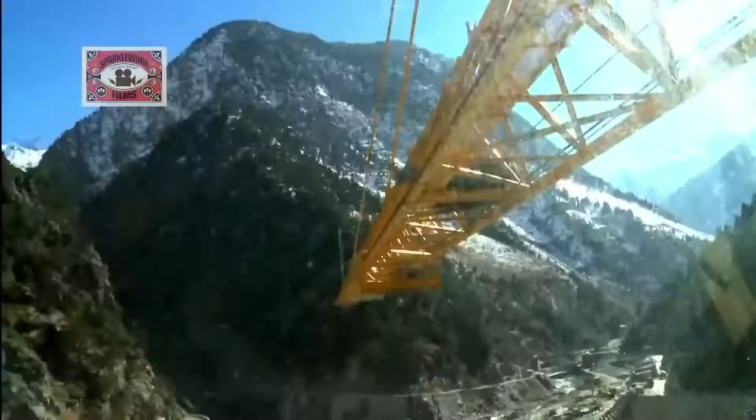There are no half measures in the founder's vision. An approximately $1.5 billion state-of-the-art hydropower project with a capacity to generate 1,000 megawatts. Once completed, it will be the largest hydropower station ever to be constructed by an Indian private company.

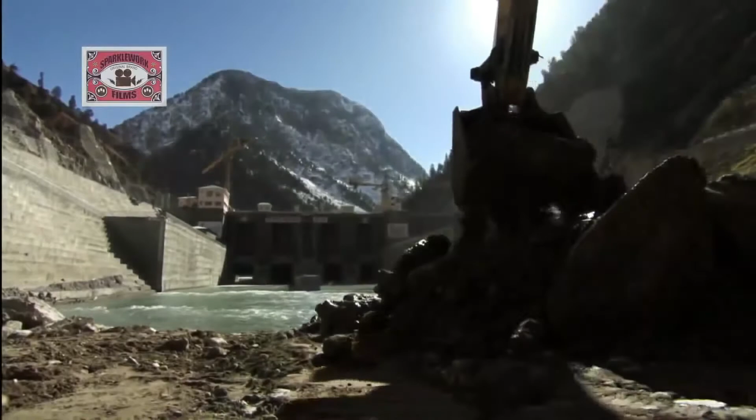When the organization was thinking of implementing the Karcham-Wangtu project, all of us were determined that let us create an aggressive timeline. So we thought let us keep a time frame of 5 years and then we will work out whether we can better it. Now, with the clock ticking, it's all about finding the perfect location.

At first glance, the tiny hamlets of Karcham and Wangtu seem an unlikely site to realize an ambitious megastructure vision. Surrounded by jagged peaks, prone to sub-zero winters and accessible only by steep mountain roads. But when it comes to the science of generating hydropower, this valley is tailor-made.

The river Sutlej provides the mass of water. The steep gradient between the proposed dam site and the power plant provides the ideal head. The main dam at Karcham will divert a mass of water from the Sutlej into inlet gates. Water will then travel along the nearly 17-kilometer-long head race tunnel, or HRT.

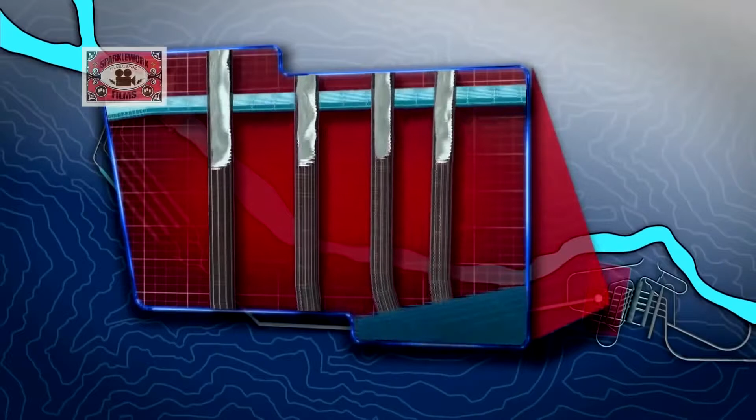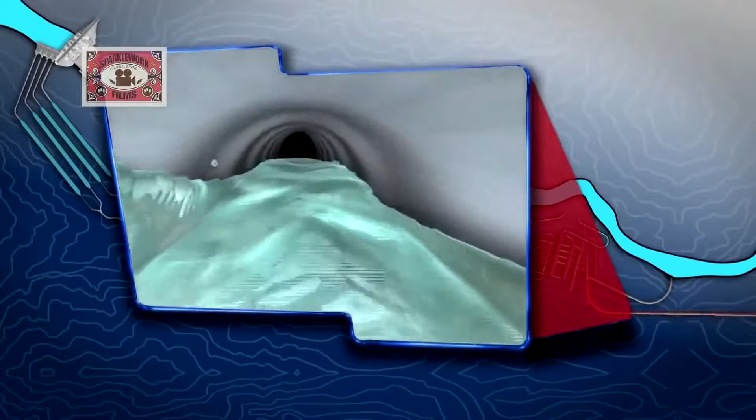From here, it's a steep drop through a height or head into the turbines of Wangtu's powerhouse. It is here that the river's kinetic energy will be transformed into electricity. Further onwards, the river Sutlej will flow out through the TRT, or tail race tunnel, back on its original course. With the blueprints in place, it's time to set the works in motion.

Strong winds blow across an intimidating landscape, and it's immediately clear setting up this construction site is not for the faint-hearted. In order to realize this onerous task, the builders commissioned their top commander to set up base camp for the men and the machines needed to build this megastructure. Brigadier Upal brings over 35 years of experience in the Indian Army to the Karcham Wangtu project. Almost immediately on reaching the site, he knows it's an uphill battle.

In the mountains, it's very rare to find a flat piece of ground. A river flowing and hardly a bank of the river, and the bank was also very low, just running along the riverbed. So to create a camp in a terrain of this kind, we had to literally fill up the whole place with a large amount of boulders, stones, rocks, sand to bring it up to the height it is today.

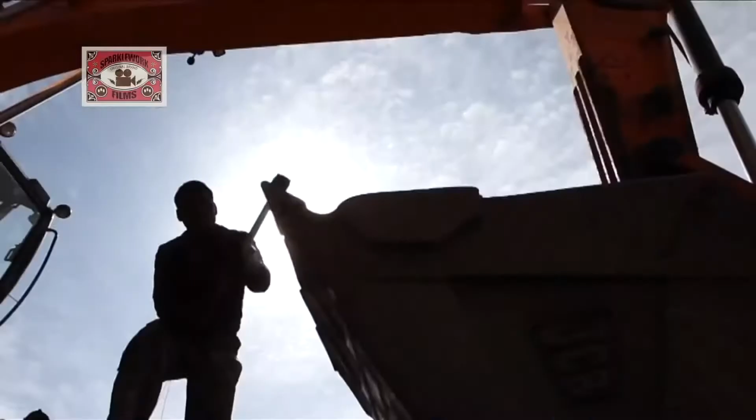Keeping steady pace, the trucks ascend to Karcham and Wangtu. Meanwhile, in the valley below, the task of harnessing the Sutlej begins. Deep in the gorges of Karcham, excavation for the dam's foundation is scheduled. But before digging can begin, there's a river to divert. The Sutlej must be temporarily diverted through a 541-meter diversion tunnel.

Two cofferdams will help maintain the river's new course, preventing water from seeping into the main dam's construction site. Cofferdams are temporary structures, often made from rock fill, which can get washed away with every monsoon. But with the clock ticking on the project's record-breaking deadline, this dam site requires a sturdier fortress. Designers create a cement-reinforced structure that won't need to be rebuilt after the rains. With the Sutlej successfully diverted, it's time now to build the dam.

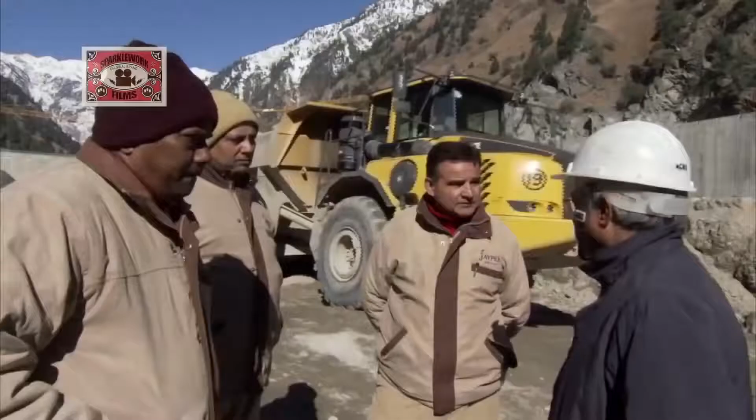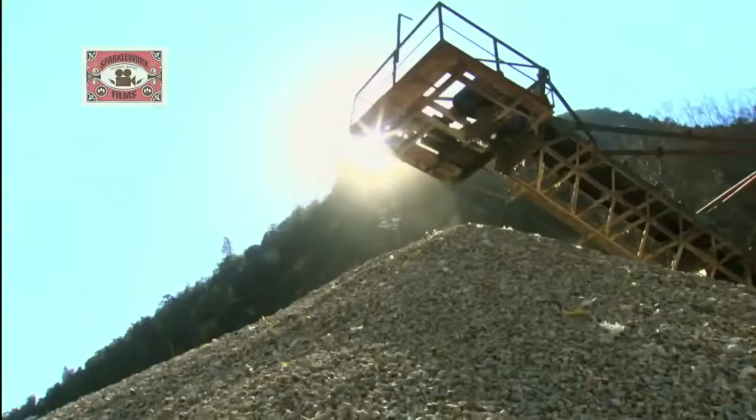At the helm of affairs is Civil Works in charge K.K. Sood. He spent the better part of his life building hydropower projects across India. When I started my career about 33 years back, a 100 megawatt project used to take 15 years for completion, and about 10 to 12 years back, a project of magnitude of 300 megawatt used to take about 7 years. Now, K.K. Sood's men must ensure that construction on a 1,000 megawatt project is completed in under 5 years.

But as the team prepares for dam excavation, it realizes that plans set by men are often overruled by nature. Geological tests reveal startling information about how deep the dam's foundations would need to go.

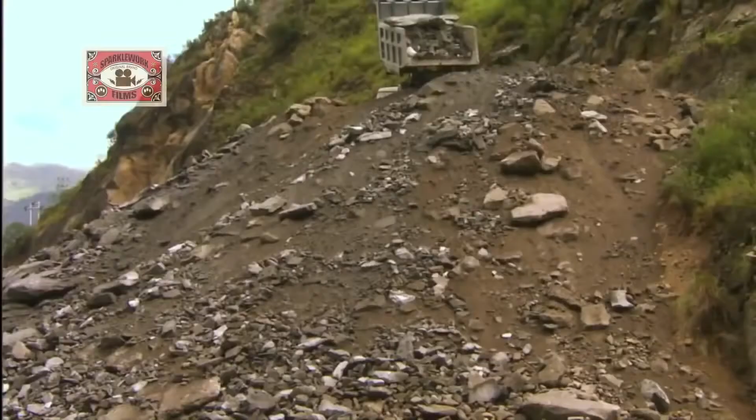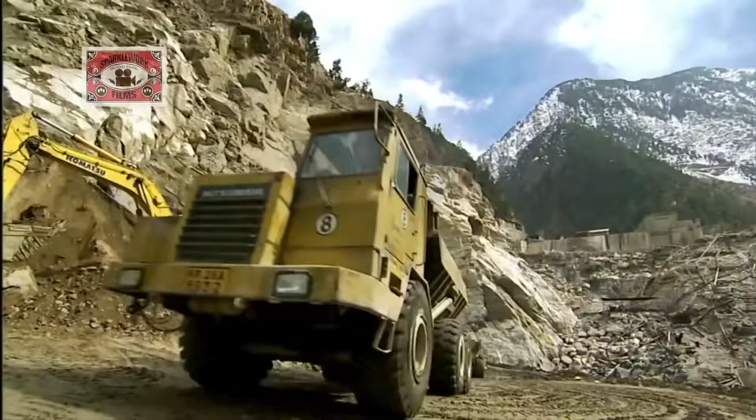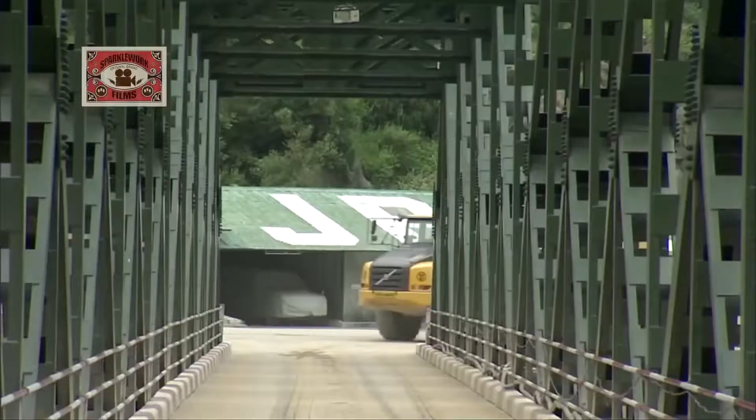Most dam foundations in similar locations go no deeper than 30 to 40 meters below the riverbed. At Karcham, the difference between the riverbed and the dam's deepest foundation level is measured to 53 meters. Engineers now stare at the prospect of going at least 10 to 15 meters further underground. They are faced with two choices: delay the date of completion and miss the deadline, or make way for the big guns of construction.

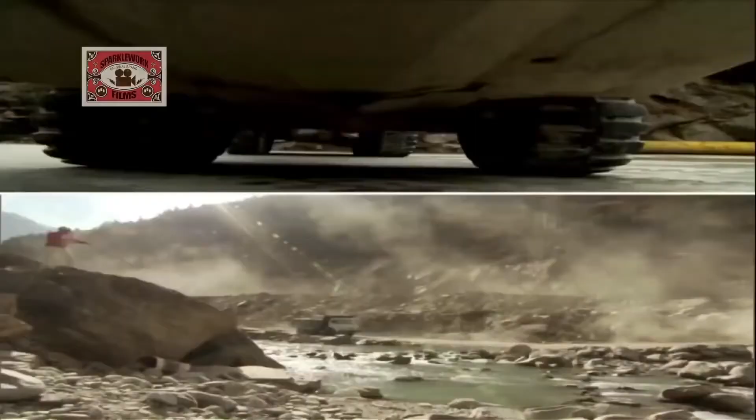Within the stillness of this North Indian landscape, there's frenetic activity underway. The foundations of the main dam at Karcham have reached depths of over 50 meters below the riverbed. Removing the excavated material is a major challenge, one that conventional dumpers literally can't rise up to. So the builders call in the big guns of construction, 6-wheel drive articulated dumpers. Their combination of flexibility with pure muscle allows loads of up to 37 tons to be carried up a height of 1 meter along a length of just 5 meters.

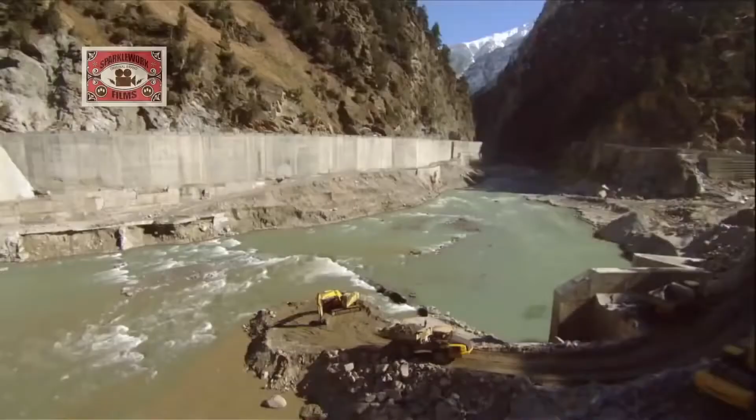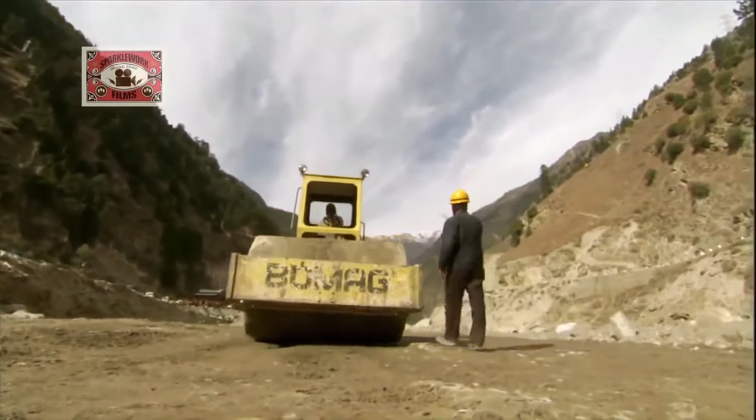While these machines expedite excavation, engineers turn to another pressing concern: securing the coffer dam at depths exceeding 50 meters below the riverbed. The design team takes a bold decision: large-scale cement grouting of the coffer dam's foundation up to depths of an extraordinary 67 meters.

We opted for jet grouted columns. This is nothing but an interlocked row of columns of concrete constructed by drilling holes. We lowered a pipe with a nozzle and pumped the cement grout at a high pressure. So there was overlapping of the columns, and a continuous impervious curtain in the riverbed was available.

As one problem is solved, another one quite literally seeps in. Work on the 1,000 megawatt Hydel power project is moving along smoothly when a minor trickle in the coffer dam becomes a deluge. The River Sutlej seeps into the main dam site, threatening to undo 2 years of excavation and building. Dam in charge Sanjay Gupta rushes to the site.

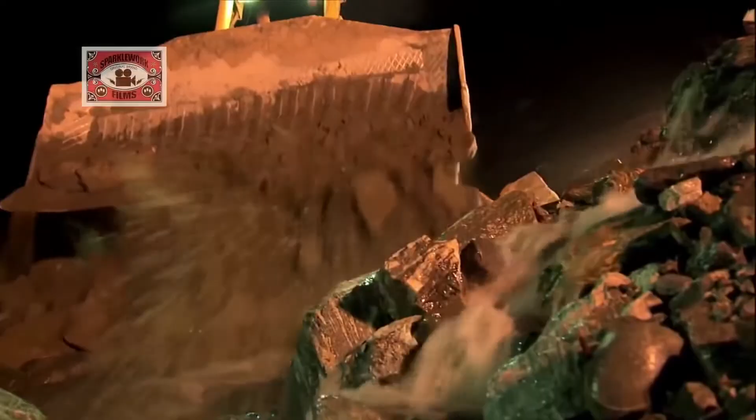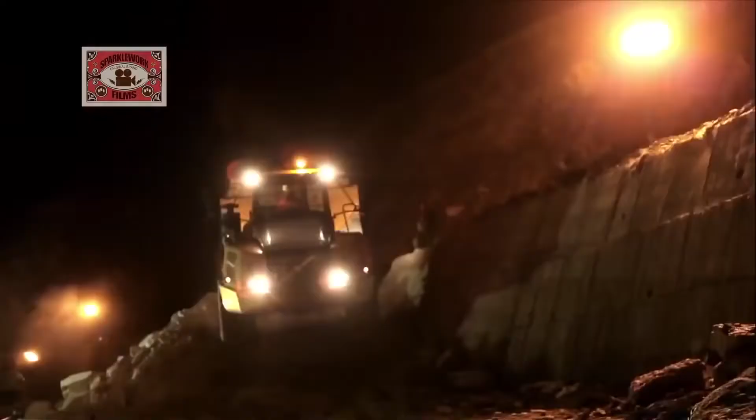Bulldozers erect a wall of rock, while dewatering pumps work round the clock to stem the flooding. Everybody works there. हर आदमी, top management, middle management, lower management, around 200 laborers. That was something different. So you can say total satisfaction.

24 hours later, the worst is over. The team has managed to convert a serious roadblock into a badge of honor. But there are bigger accolades to be earned, ones that will truly render the project a megastructure. Engineer Ashish Bajaj picks his steps carefully inside the dam's intake sedimentation chambers.

Sedimentation is a process that removes suspended solids from water. This cavernous expanse is the project's crowning glory. Its task: taking on the Sutlej's silt menace. The Sutlej carries large amounts of river sediment in its waters. This spells murder for power turbines, where particles as tiny as 0.2 millimeters can shut down massive Hydel plants.

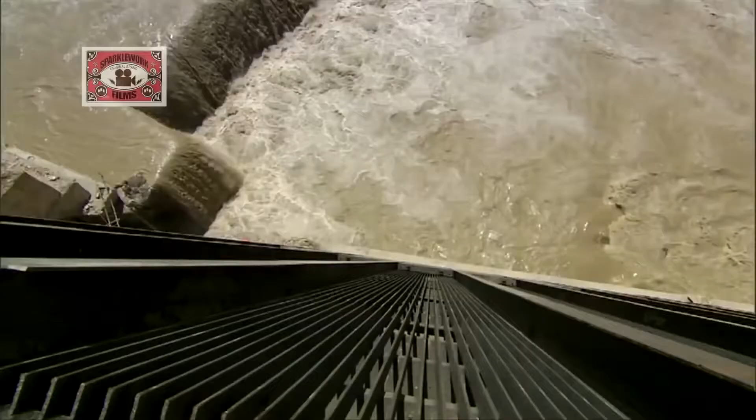To avoid this fate, water is made to enter the tunnel system 15 meters above the riverbed. This ensures that only surface water with reduced sediment flows in. To seal the deal, designers create 4 adjacent sedimentation chambers. Once the dam is filled, from intake it will be 4.5 meter per second velocity of water that will come in.

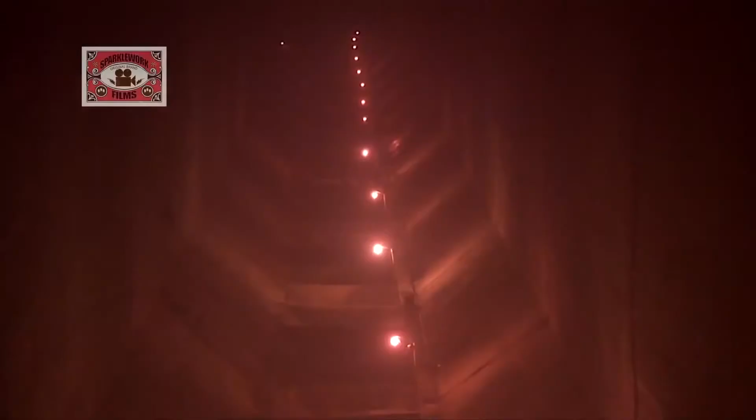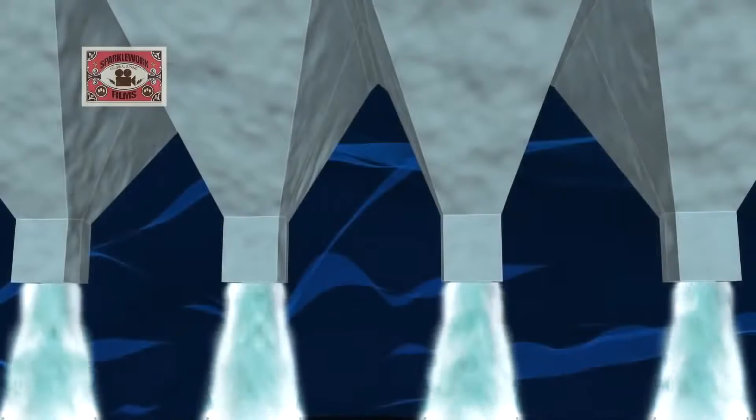And in sedimentation, that chamber has been put down up to 0.3 meter per second, so that the water gets stagnant over here. And there are 53 cones, 53 hoppers, through which these particles will get down to the flushing tank. Gravity guides silt through these 5.25 kilometer long flushing tunnels, back into the river downstream. These are the longest flushing tunnels to be found in the Indian hydropower sector.

But the record-breaking streak doesn't end here. These sedimentation chambers have a design discharge of 504 cumecs. That's a whopping 504 cubic meters of water per second. This is the world's largest chamber volumetrically, and most probably this will be going into the Guinness Book of World Records.

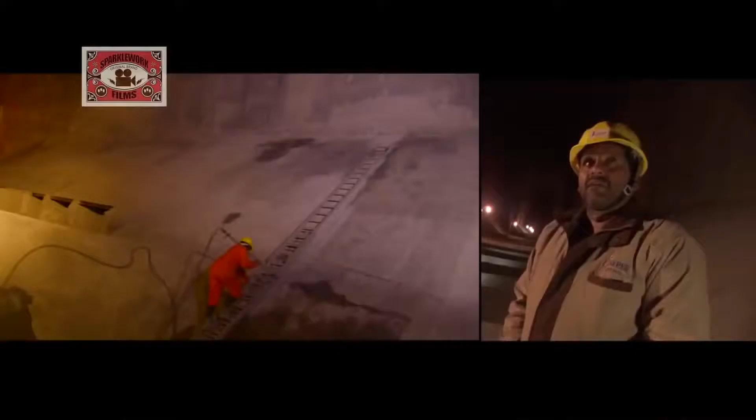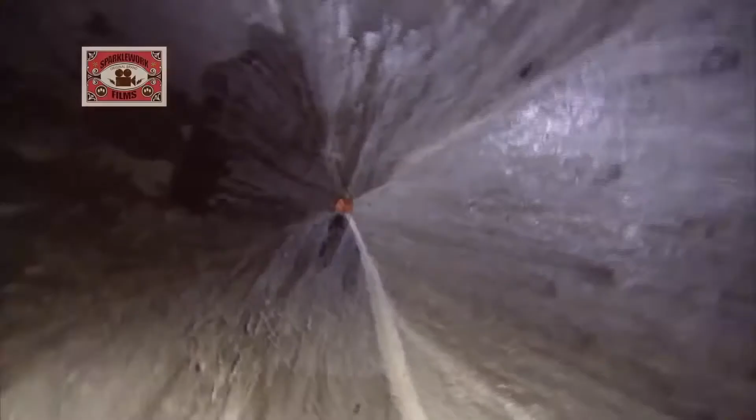This is 424 meter long with 70 meter transections. That makes it 494 meter with a 35 meter depth and 18 meter wide, all lined. This whole chamber has been reinforced. This is all RCC lining done over here. With the world's largest sedimentation chambers installed, builders have overcome yet another Himalayan challenge.

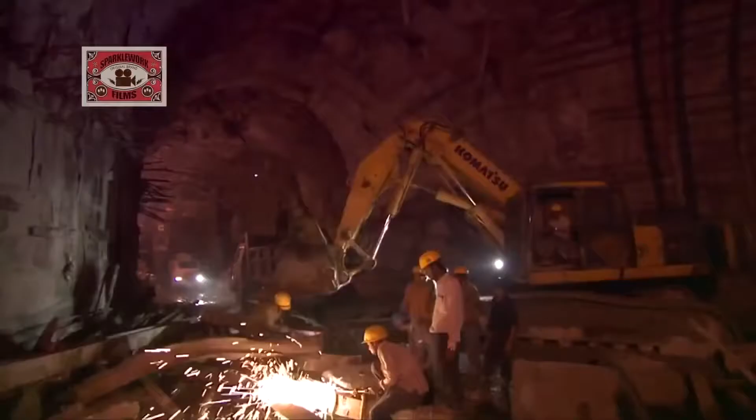As distinct from large storage dams, the Karcham Wangtoo hydroelectric project is a run-of-the-river facility, where the Sutlej is diverted temporarily to run electricity-generating turbines. Then it is restored back to its natural course in the Himalayan gorges. Part of this design involves large-scale tunneling into the mountain. Over 44 kilometers to be precise. Of these, the Headrace Tunnel is critical to the power equation. It's also the longest.

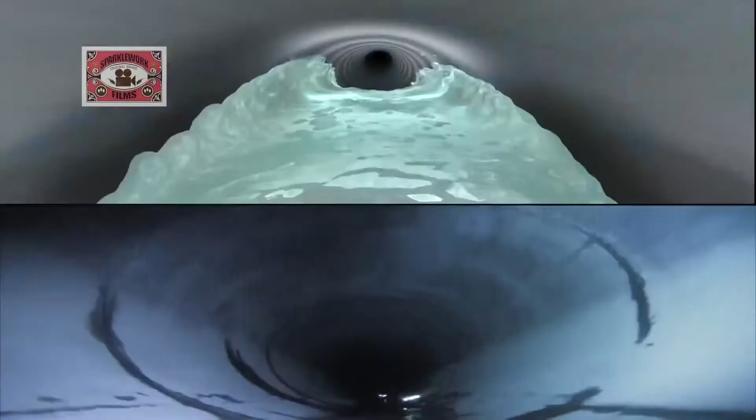The Headrace Tunnel, or HRT, is 17 kilometers long, running along a downward slope inside the mountain face. Water taken from the intake hurtles at 4.88 meters per second through a cylindrical tunnel of 10.5 meters in diameter. By the time it reaches the head of the tunnel, it gathers enough kinetic energy to power a 1,000 megawatt power station. But before it can do that, there's some heavy-duty boring to be done.

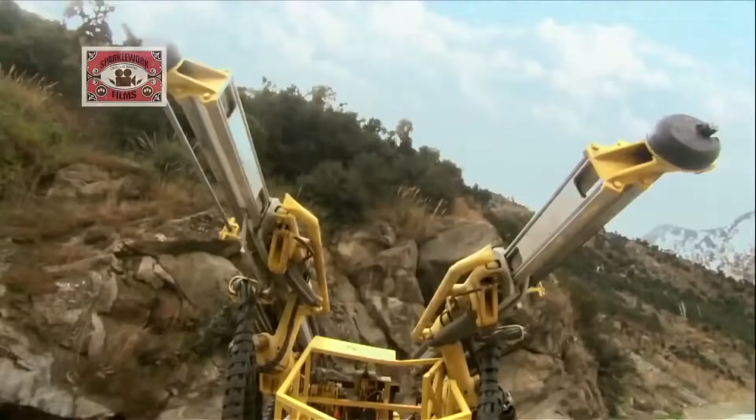This is the muscle for boring through mountains. Called boomers or jumbos, the project has commissioned a whopping 39 machines on site. The process of advancing is, first of all, we drill holes up to a length of 4 meters with the help of drill jumbos. Then we charge it with explosive, and then the entire charge is fired. After every fire, we get an advance of about 3 meters.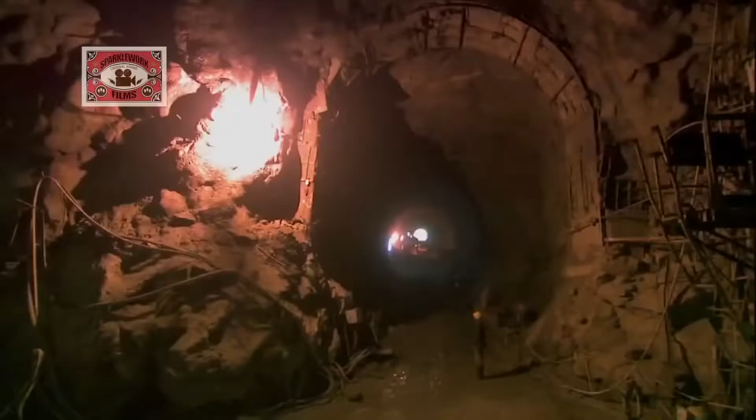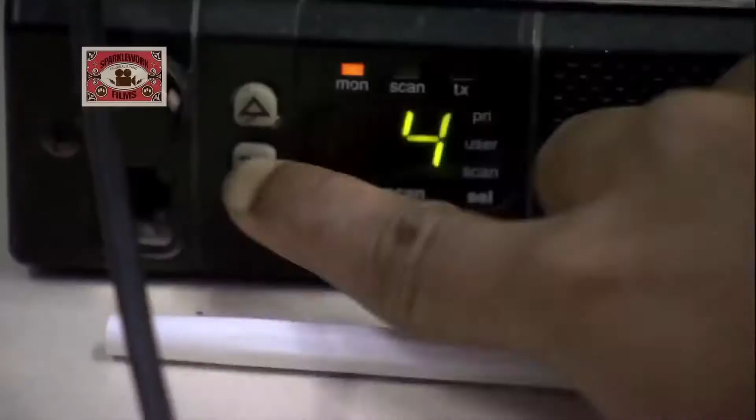For a while, the tunneling team makes good time on advancing along its tunnel path. But things are about to get heated. Soon enough, the builders receive startling information. Workers have run into extremely high temperature zones near one of the approach tunnels, or adits. Hot steam is gushing from cracks in the rock face. Extreme humidity and vapors have turned this area into a virtual pressure cooker.

What's going on inside the mountain? The answer will come from an elite group of mining detectives. Builders bring in experts from the Central Institute of Mining and Fuel Research, or CIMFR.

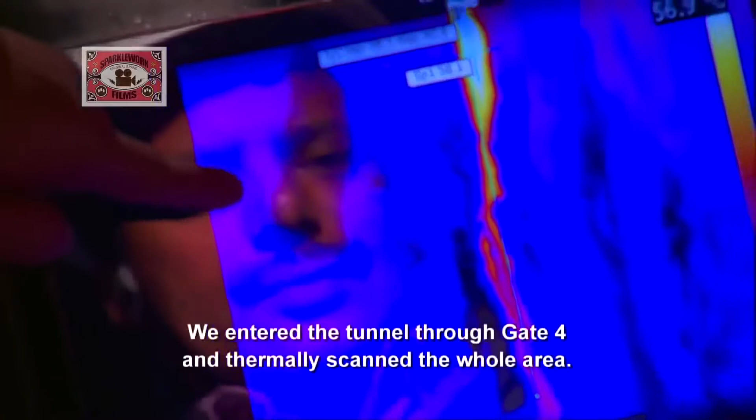Temperature varied between 60 and 98 degrees. Lot of vapors, high temperature.

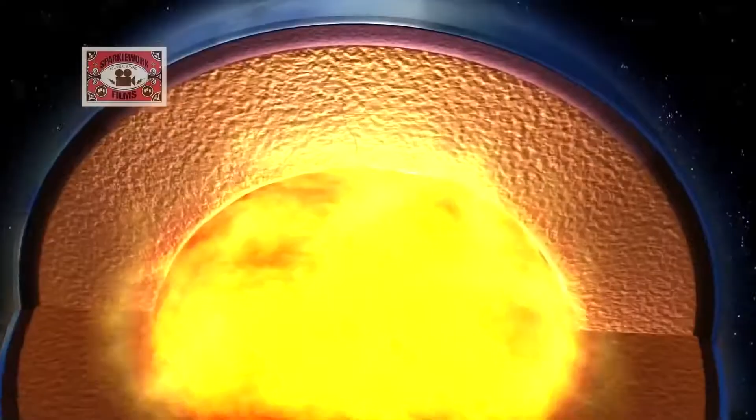Investigators trace these extraordinary circumstances to the Himalayas' fractured geology. We could arrive at a conclusion that it may be magmatic heating. The earth's crust is floating over the very hot magma. So somehow, due to some cracks, this heat is being dissipated. Because it is continuously being released, that means the source has not been exhausted. Tunneling is immediately halted. Under such high temperatures, there's danger of detonators and explosives blasting prematurely. Timelines set for this ambitious project seem to be going awry.

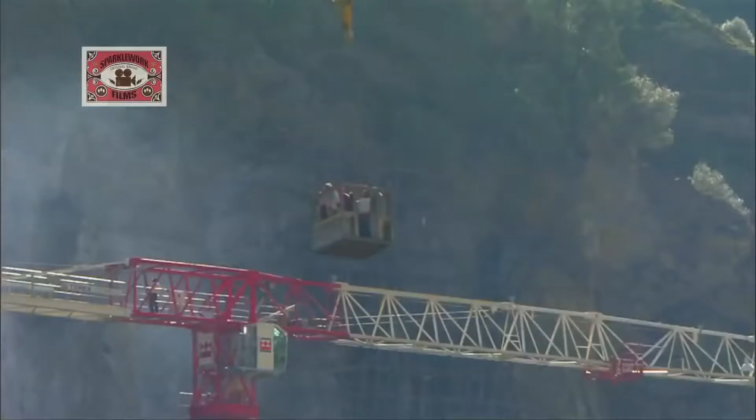Things are getting heated in the Himalayan hamlets of Karcham and Wangtoo. Construction crews at India's largest private hydropower station are facing a pressure situation rarely encountered anywhere in the world. Tunneling into mountains has revealed intense hot zones with temperatures as high as 98 degrees Celsius.

The construction team devises a precisely timed operation. They can't afford more than half an hour to clear an area. Workers rush in and spray cold water on the rock face. Detonators are placed 100 meters away from the rock face. Then the blast is set off. Never before have such extreme circumstances been encountered and overcome in India.

Meanwhile, across the valley, other heights are waiting to be conquered. This mountaintop is the site for the Hydel Project Surge Shaft. It poses a unique challenge for project engineer Samrinder Kumar.

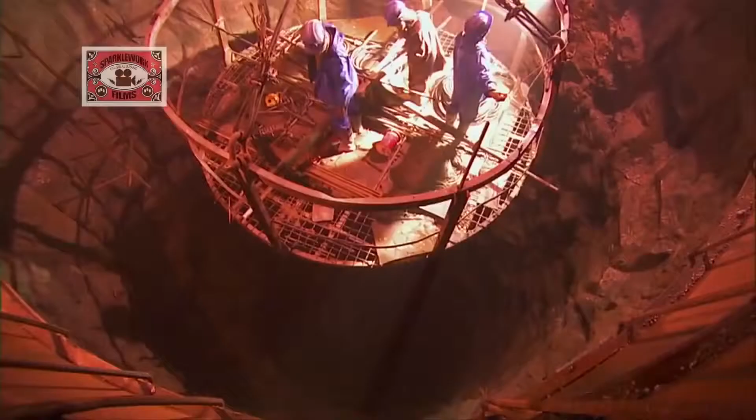Samrinder's team must commence construction on the straw-like shaft that's crucial to ensuring water balance for the entire power station. When water gushes through the headrace tunnel, it passes through pressure shafts and drops vertically down into the powerhouse, turning turbines. The surge shaft is a safety feature to accommodate excess water in case the turbines are shut down for any reason.

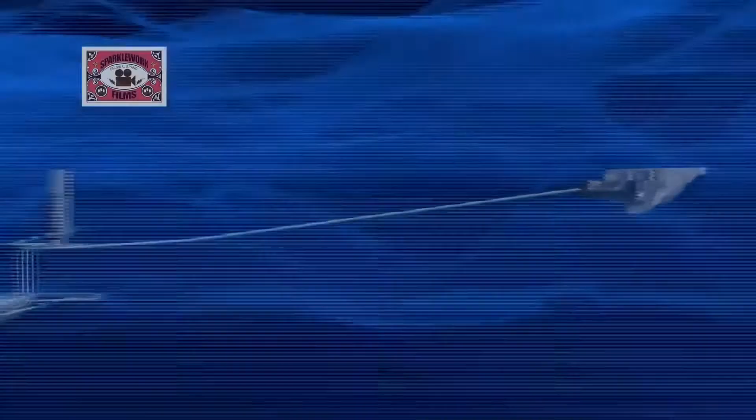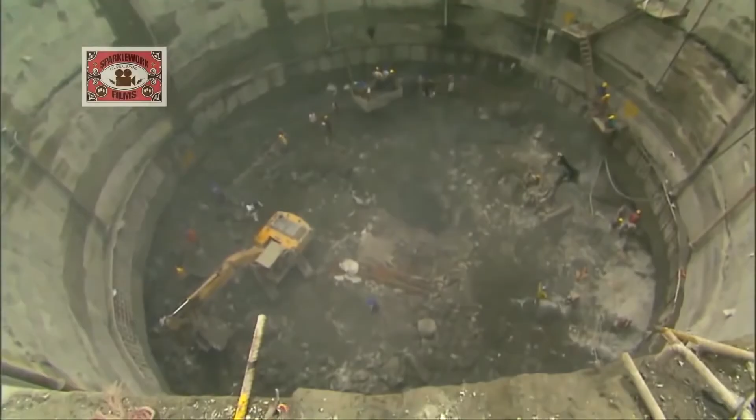Wasting no time, a group of expert climbers is roped in. Scaling the mountain face, they carve out tracks for a pathway. Inch by intrepid inch, they construct a foot ladder made from iron rods.

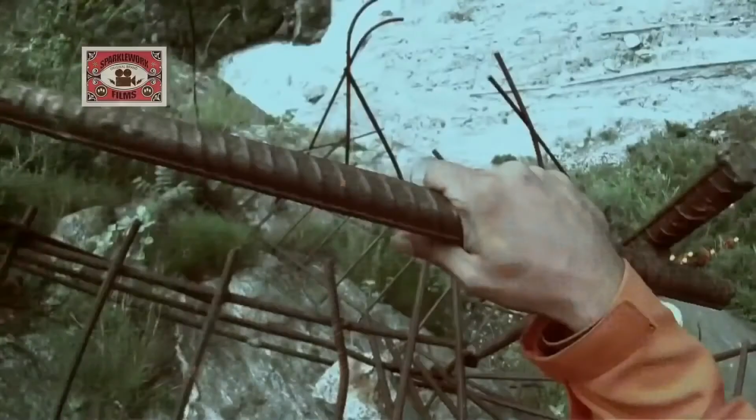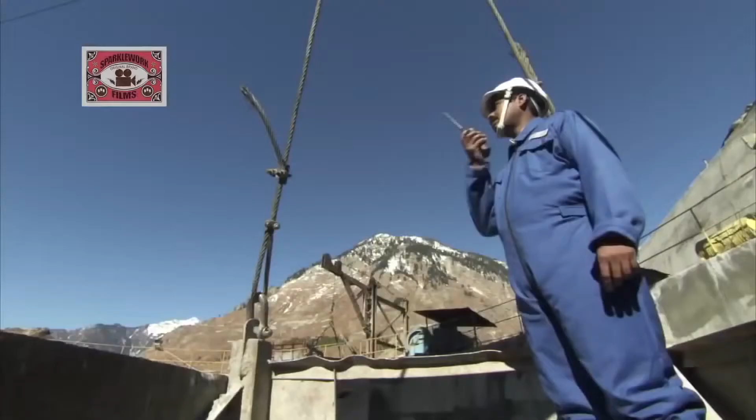Workers climb the 185-meter slope to build the approach road and start work on the surge shaft. Their goal: to complete the approach road without losing a single day of construction. Piece by piece, blueprints imagined by the project's design team are being raised from the ground up. Meanwhile, the biggest piece in the power structure is being constructed deep below.

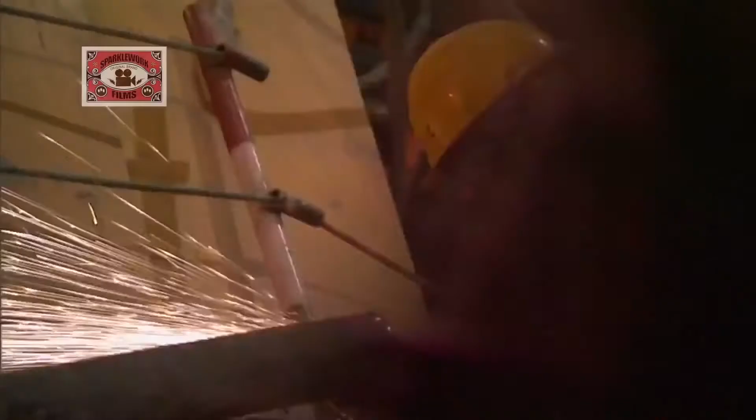Far within the cavernous recesses of Himalayan peaks lies the underground powerhouse of this 1,000 megawatt facility. This is the heart of the Karcham Wangtoo project. It's where the gushing might of River Sutlej transforms into electricity. Keeping this heart beating are 4 state-of-the-art turbines, each capable of generating 250 megawatts of electric power.

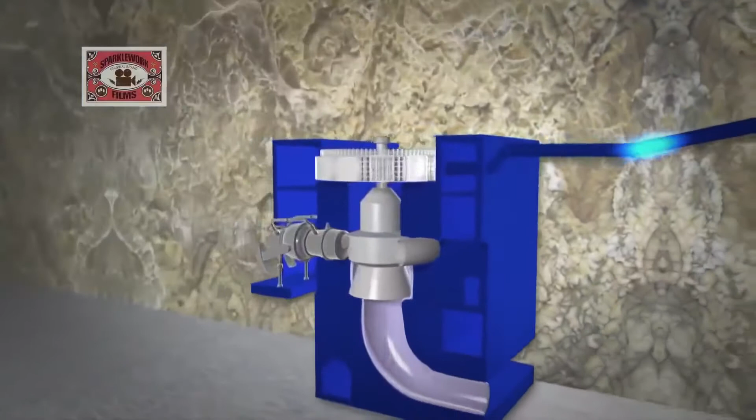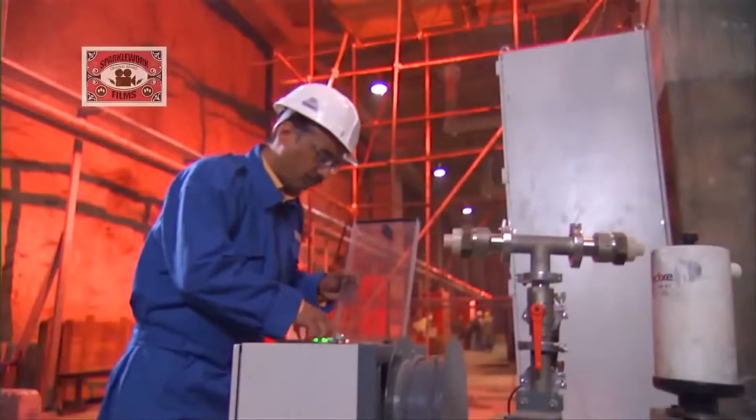Electricity generated in these machines will travel to the transformer hall. Here it will be stepped up, which actually means boosting the voltage of electric current. This stepped-up current will then be evacuated out of the powerhouse through a switchyard into the national electricity grid.

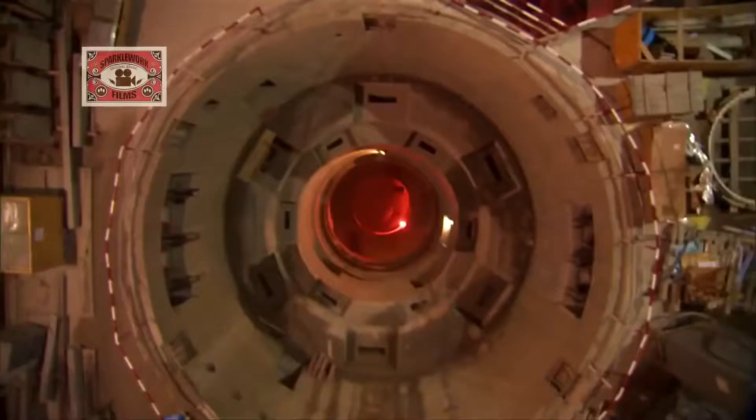At Karcham Wangtoo, veteran hydroenergy engineer Kanti Prasad oversees powerhouse construction and its most critical component, the turbines. The total weight in this turbine, in this generating unit, would be more than nearly about 700 metric tons. With the powerhouse turbines yet to be commissioned, Kanti Prasad's most immediate task is lowering its massive components into these hollow chambers. It's heavy lifting that will require heavy infrastructure.

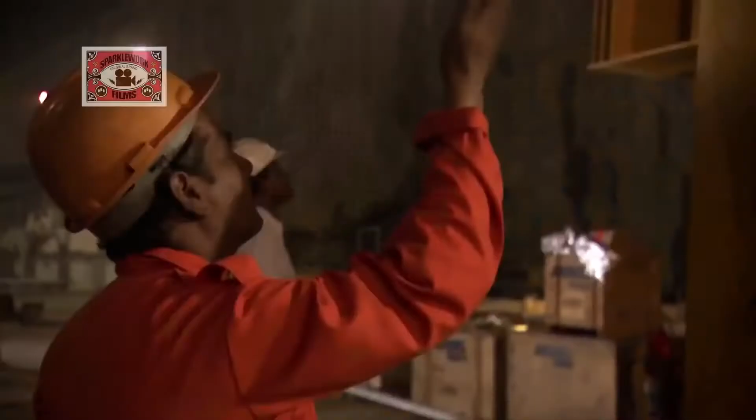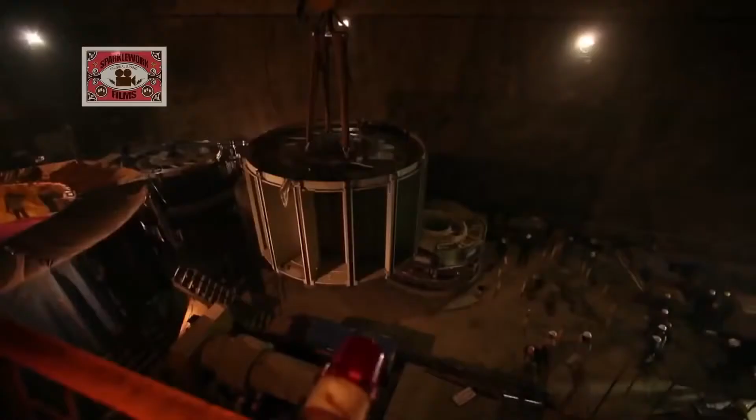This is one of the largest pieces of equipment to be used in the project: the Electric Overhead Travelling, or EOT crane. This mega crane can install loads of up to 275 tons with an astonishing 1 millimeter precision. But it's not just the numbers that are striking. Ingenious designers have used the cavern's natural attributes to create history.

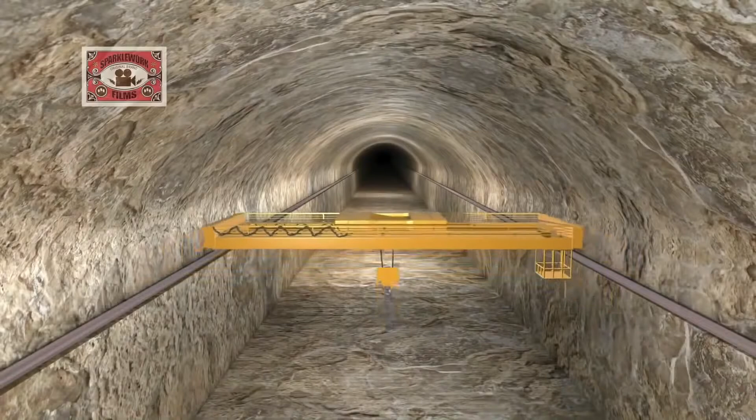We decided to make a ledge, which has been done for the first time in the Himalayan geology. We have made a mushroom type of structure in the rock itself, and we have created a crane beam right on the ledge. And on that ledge we have laid our rails, and on those rails our EOT crane is operating. This way we were able to get the crane on day one when we reached the bottom, and we were able to erect our machinery much earlier.

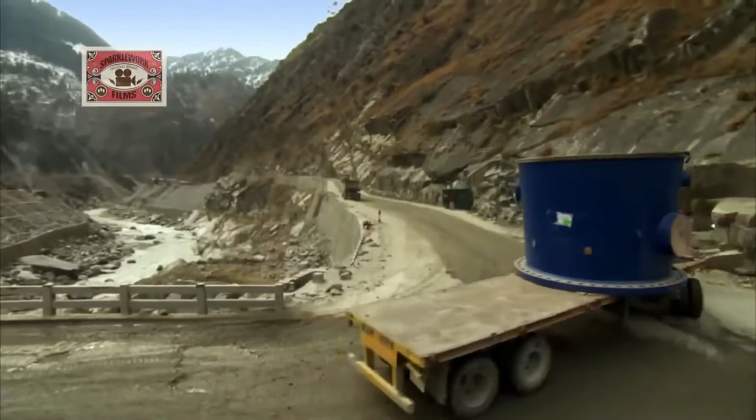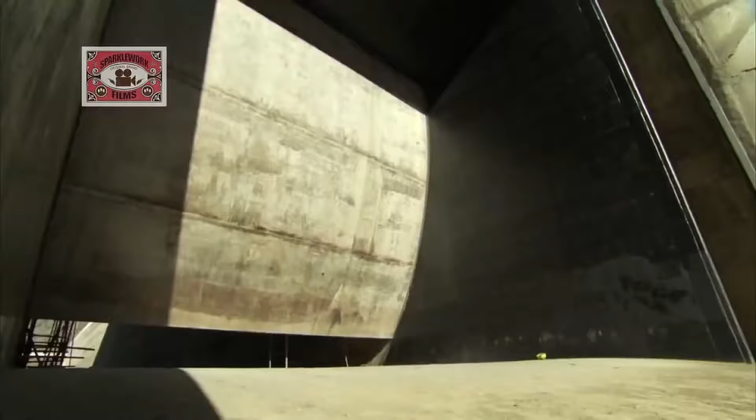At Karcham Wangtoo, works for the 1,000 megawatt Hydel project are nearing completion. It's taken just about half a decade to become one of the fastest builds in the history of Indian hydropower projects. Electricity must now fan out across the mountains to reach the energy-hungry populations of India.

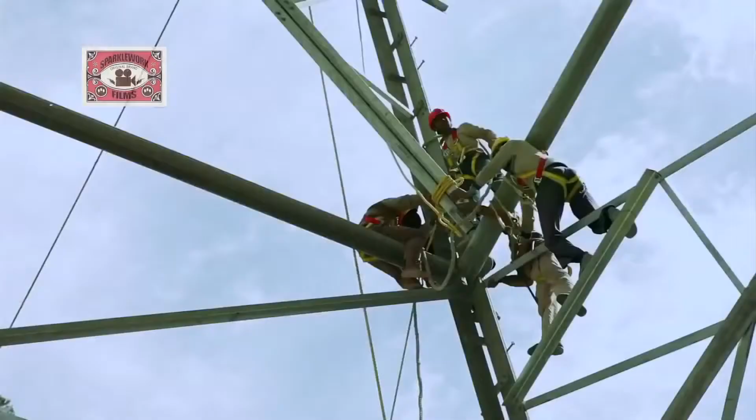This is the final leg in the power journey. It involves setting up 217 kilometers of transmission lines from the peaks of Karcham and Wangtoo to Abdullapur in the plains of Haryana.

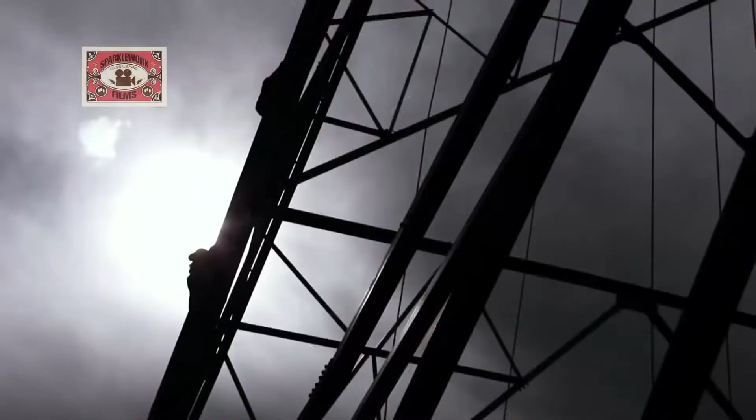The higher altitude we are traversing, it is around 2,450 meters. The difficulty in this area is that we have very steep slopes where the positioning of the tower itself is a problem. So to negotiate that slope and to cut that slope and lay the tower, sometimes the slopes are so steep that a single person cannot stand on that point. In my opinion, this transmission line is one of the toughest lines which we are laying in India.

In the absence of motorable roads, over 500 transmission towers must be built by hand, with materials and equipment transported manually across the harsh terrain. Collectively hauling the nearly 50 tons required to build one single tower, it's often a steep climb through uncharted territory. But where footpaths end, workers must take to even more dangerous ways to cross the valley. This is how workers transport building materials and equipment between two transmission towers, sometimes across distances of over a kilometre long.

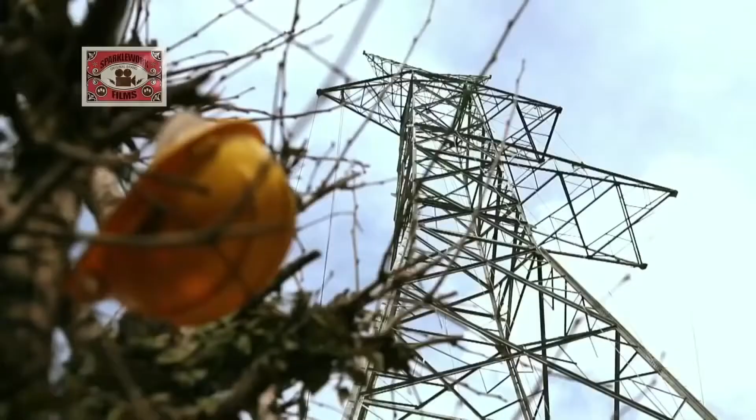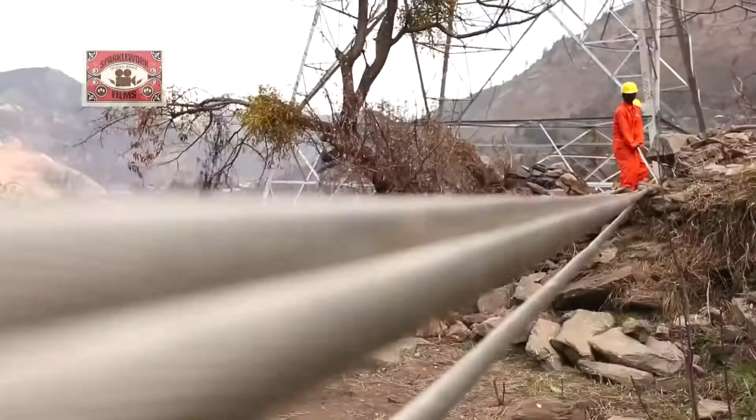Once the towers are erected, 400 kilovolt conductors and insulators weighing approximately 30 tons are pulled manually to be strung up on the towers. 7,000 workers have banded together to create a network of transmission towers collectively weighing a massive 25,300 tons. The day is not far when the fruits of their labor will be realized in full megastructure glory.

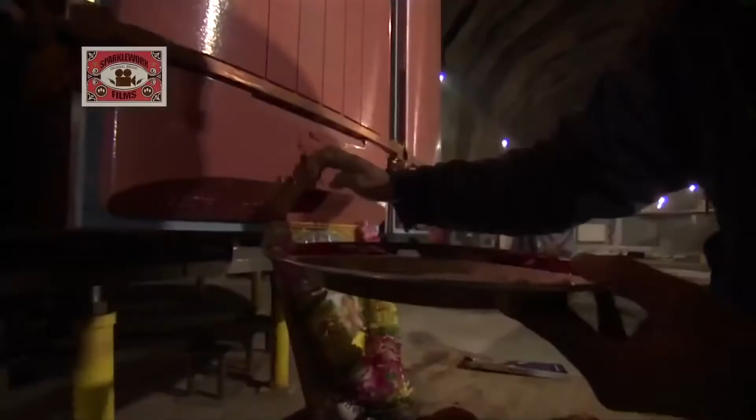Inside the completed powerhouse, it's a very big day. It's time to lower the multi-million-dollar rotor into its turbine chamber.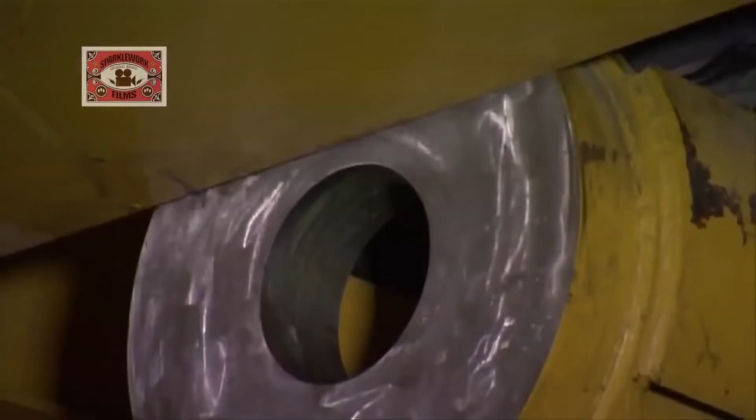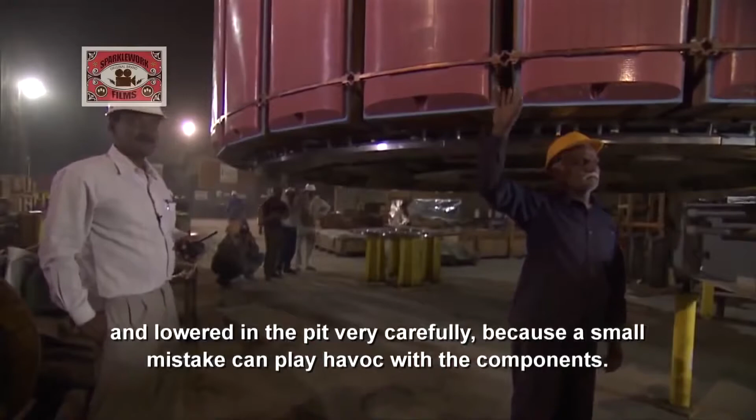All eyes are on the cranes. It's a very precarious operation, with nearly 500 tons of metal and millions of dollars hanging in the balance. This is the heaviest component of this unit, and it is very important that it should be lifted and lowered in the pit very carefully. Otherwise, a small mistake can play havoc with the machine as well as other components, because the whole load is coming on the cranes. Slowly but surely, the rotor inches closer to its destination.

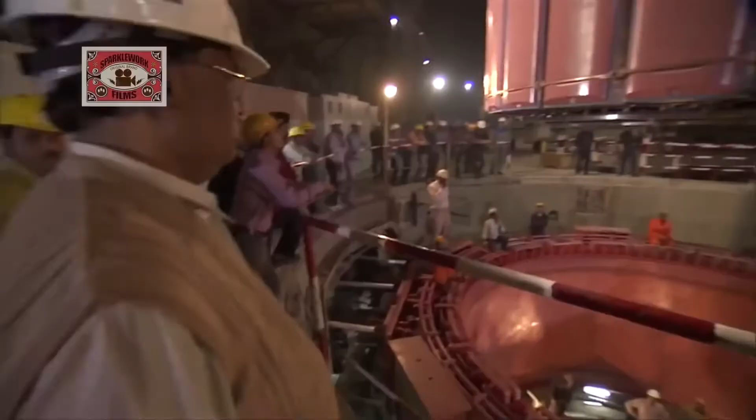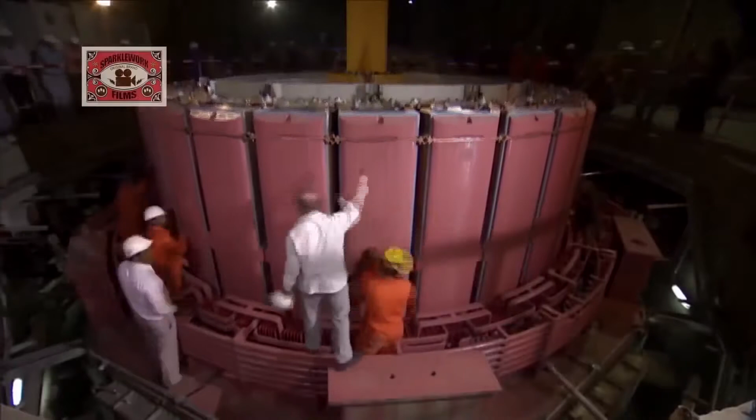On the ground, anxious engineers wait to receive the mammoth component. For the powerhouse team, this is a cliffhanger moment that leaves no room for error. As it lowers, its trajectory is mapped to exact precision. Not a millimeter must be out of sync. Like a 3-hour movie which you are watching in the theater. Now we have come very close to the commissioning of this unit.

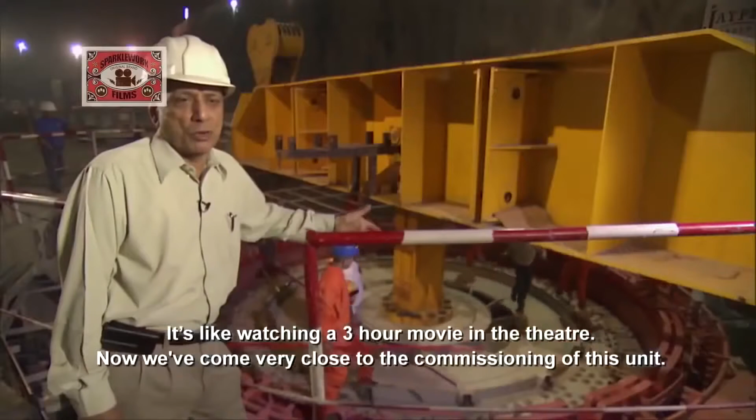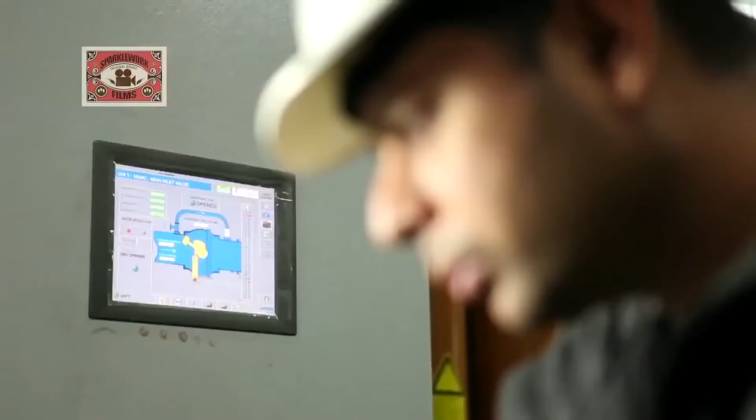Upstream at the main dam site, the gates of the dam are lowered, and the reservoir of the Karcham Wangtoo hydroelectric project begins to fill up for the first time. Inside the powerhouse, pre-commissioning checks are at a critical stage. There can be no room for error as the water makes its way across the 17-kilometer head race tunnel to reach the powerhouse's threshold. For the first time, huge butterfly valves are opened to release water into the pressure shaft.

All systems are ready to go. It's time for Jaypee's visionaries to set the wheels of their dream project in motion. It is now on record that in the 11th Five Year Plan, Karcham Wangtoo project is the largest project that got commissioned, whether public or private sector.

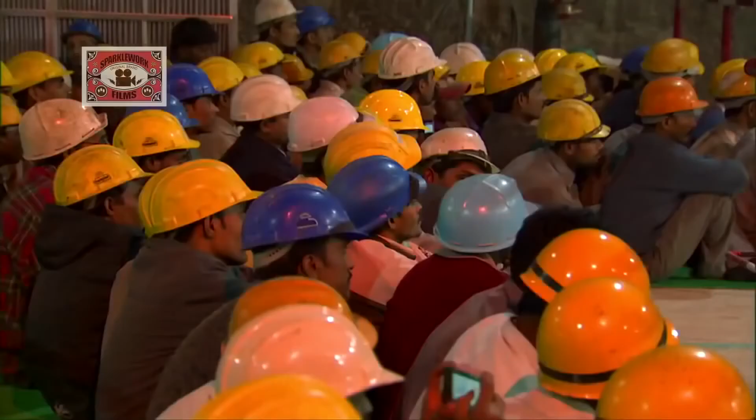The hall crowds with the faces of all those who have worked tirelessly to complete construction in a record time of a little over 5 years. At a specially appointed hour, Kanti Prasad formally commissions the first turbine.

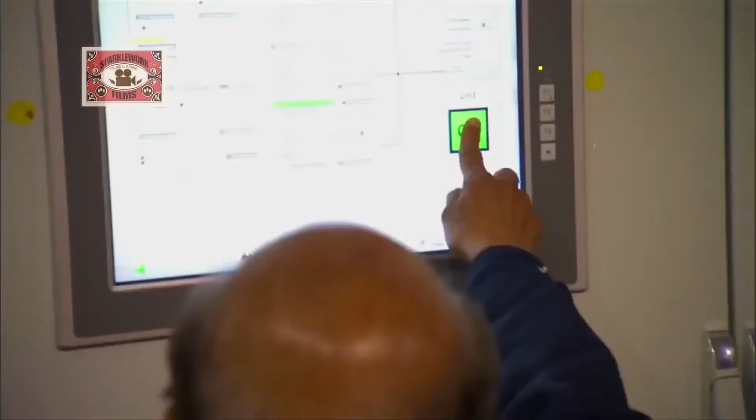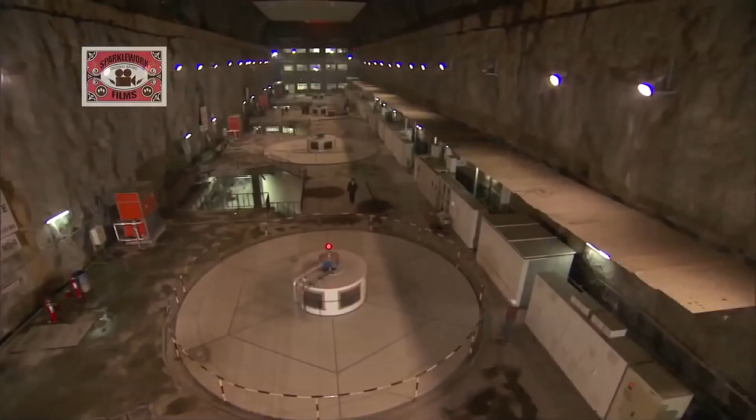The Karcham Wangtoo project is one of the group's crowning achievements. I am one of those power engineers who had the privilege of working from 2.5 megawatt to 250 megawatt. So you can imagine my own happiness. With the 4 turbines working to full capacity, the business of powering a nation gets underway.